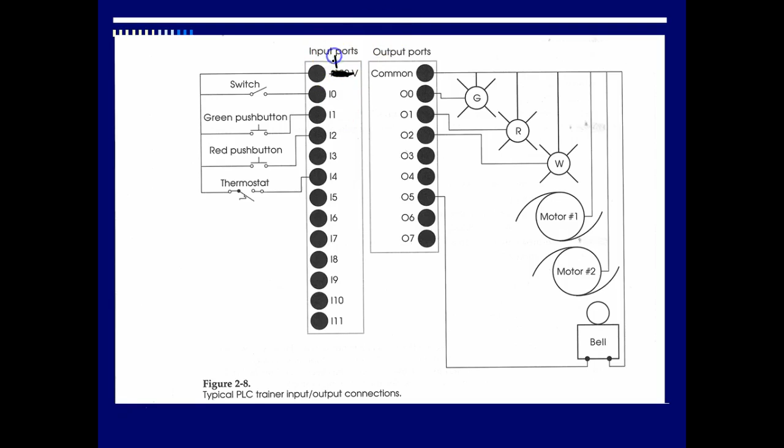So this is not sinking and sourcing, but if this was DC, they say AC on this one. I don't know if this figure is right or not, guys, but we'll just make it DC. So let's come over here and I'll say plus 24. And then this would go out, and this would be the common for all my inputs. So that means my inputs would be sourcing, so this module would have to be a what? Sinking module. You understand that?

That makes sense? So over here on our outputs, this is a sourcing output on the 504s. So that means their common inside the PLC is a positive. So what would I have to send out through here? I would have to send a negative, good. And so we would say these devices would be sinking.

And this only comes into play with DC. If you're dealing with DC. Okay? If you're dealing with AC, common is going to be whichever is going to be the neutral for the line.

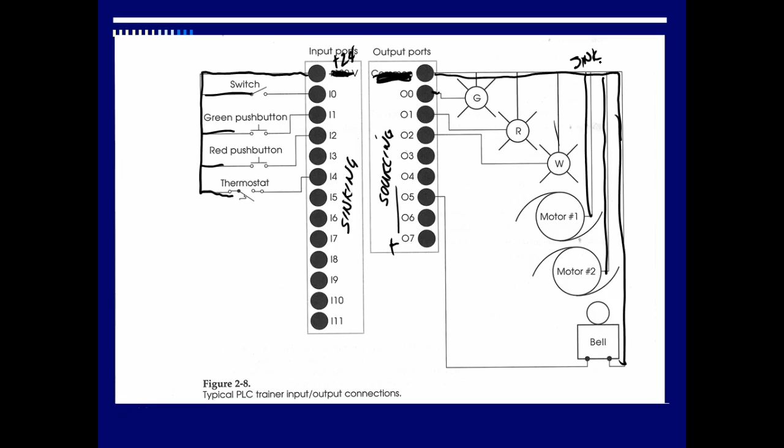Looked at that, talked about the scan. So the scan scans inputs, runs it through your program, updates outputs. We call this a scan cycle. And this is what the PLC is constantly doing. So your program is constantly looping whether you tell it to loop or not. In other programming languages, we have to do that.

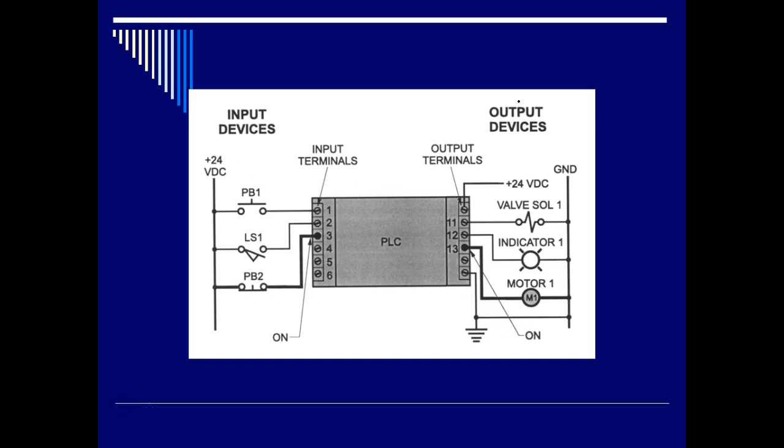So this PLC, these are what? Sourcing. So this input has to be what? This is sinking. So this guy would have to be... good. We looked at the basic ladder diagram, right? We did one.

So Allen Bradley, and a lot of y'all have played around with this. The way the addressing scheme is set up by Allen Bradley is that you start off, if it's an input module, you start and say what? I, then you put a colon. Now it knows it's going to use that as an input. Then the next thing you do is you specify a slot number. That makes sense? Then what you do is you specify words.

So this is 1, 2, 3, 4, 5, 6, 7, 8, 9, 10. One of these is going to be where you establish the common. Well, no. So on a slotted PLC, this is slot 0. I mean on the input. Wait a minute. You started at 1 for that first group. Well, I was just trying to figure out how many groups of 16. Oh, okay, sorry.

Allen Bradley runs word numbers in groups of 16. If you've got only one 16 module, then all you have to do is specify the slot number. But we can buy input modules for Allen Bradley that go up to 2 words, which is 32 bits. Okay, does that make sense? So if I've got a 32-bit input module, then I would have to say, okay, what slot is it in? So this would say slot 1.

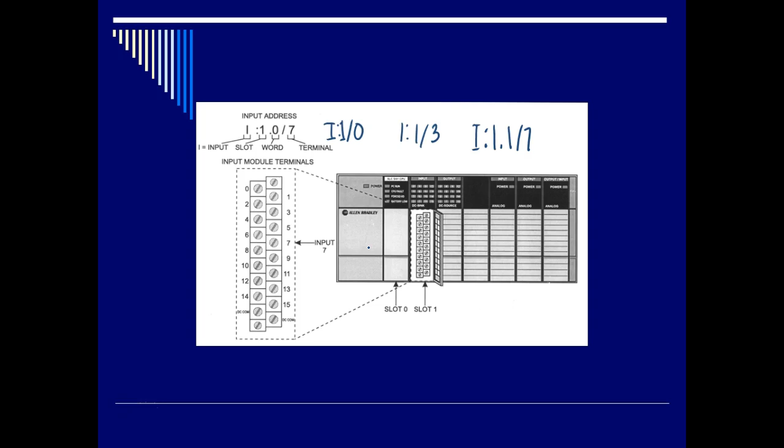So when it has 32, it just has 2 of those next to one another? No, it's all on 1. I'm talking about it's got a module like this, and it's got 16 down this side, and it's got 16 down that side on one module. So my question is then, you've got input colon 1 for the slot, then you put a dot, which lets you know that it's 32, right? Right. And then 0 for the first row, or 1 for the second row. Right. Okay, now I got it.

Yeah. If you don't have that, so ours are 16-bit modules, so we can address it I colon 1, and I need to make sure y'all understand this. So this is an uppercase I, this would be a 1, and then that would be bit 3. Which is this guy right here. I think this doesn't have a number. So this one, and this one. No.

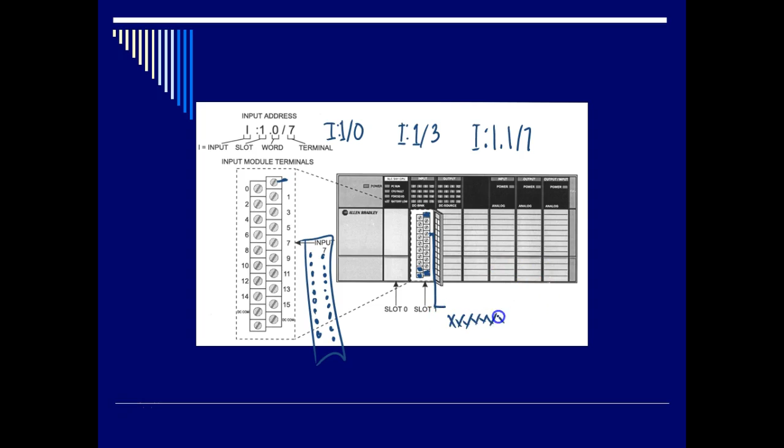What we do on binary, the bits have numbers and they go by the powers of 2. So if I've got a 16-bit number, this bit right here would be 2 to the 0. So we start with 0. So this is 0, 1, 2, 3. So on this situation right here, it just worked out to be the third one. Understand? So if I say I, then I say colon, and then I say 1/8, then this would be 8 right there, and that would be the one.

Yeah, but we start with 0. In addressing, we start with 0. It is bit 3, but the first bit we call what bit? We call it bit 0. So the first bit is bit 0. Now this kind of gets confusing, especially on this PLC, because if you look at the first input switch, they got it labeled 1. So it goes 1, 2, 3, 4, 5, 6, 7. I was looking at the input address up there.

Yeah, so this is slot, this is the word, and when it says the terminal number, that is not counting, that's the address that we assign to that number. Does that make sense? And we start counting from where? Start counting from 0. So this bit right here would be 0, this would be 1. So that's what they're calling terminal 0.

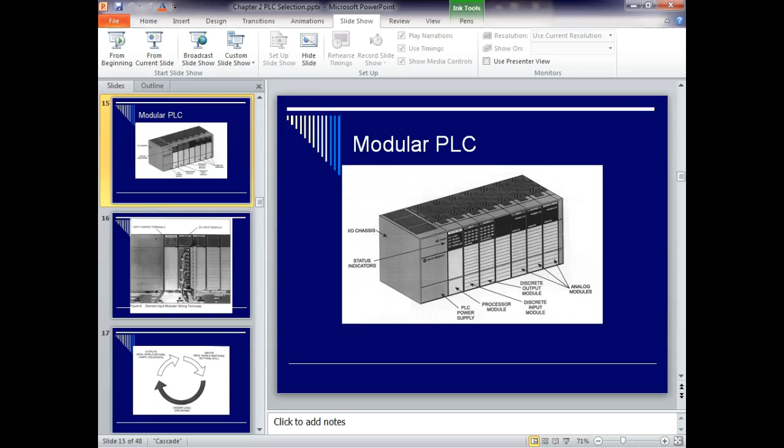Makes sense. So what happens is that when we come up here and this is a real neat application. But the problem is, if you've got that CD, you have to have that CD and a CD drive. So if you're doing this on a tablet or something that doesn't have a CD drive, it's not going to do you good. The license for it is like, I think, $15. It's in the lab book, I think. Isn't it? No. Oh, it's the hardback book.

So first thing we do if we're going to create a program on Allen Bradley, these are our instructions. Instructions are what we put in a program to tell what we want to do. And we have a list up here. What we're going to be dealing with this semester is these 4 guys right here. And then we're going to be dealing with timers and counters. But we're not there yet.

So the first thing that we would have to do, can't get it to go. By default on the Allen Bradley RSLogix software, it puts the end rung in there for you. You cannot put anything in the end rung. So the first thing we're going to do is insert a rung. Here's the rung instruction right here. I'll just highlight that, I hit this, and it puts a new rung in there for me. You notice the end rung gets another number. And then you grab what you want and drag it down in here.

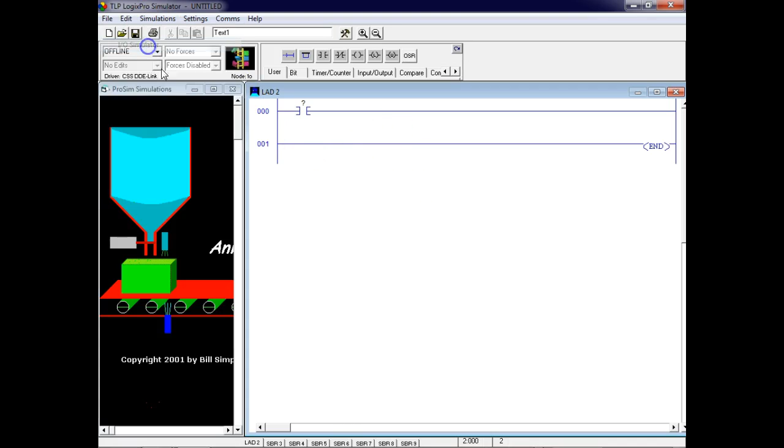So what I'm going to do is simulate the I/O. And this is what this PLC's got. Notice the first one is 0, 1, 2, 3. That was the slot it's hooked up to on the PLC. I've got inputs on slot 1, and I've got inputs on slot 3. So those are the two slots I've got available. You've got several symbols on this, which is really neat. Right now I've got a normally closed push button, but you can change it over to a limit switch, a switch or a push button.

So I've got to tell the PLC where this is at. I'm going to double click on that, and it's asking for a what? An address. So I'm going to say input, colon, and I'm going to choose that switch right there. So I'm going to say, what slot is it?

1/0. Okay? And I said enter. Now what's going to happen on the true Allen Bradley PLC is it's going to pop up and want you to give a symbol name. And what's so neat, if you give symbol names, if you're going to use that same thing from now on, you don't have to know the address. All you've got to know is the symbol.

And normally we give these symbol names according to what it does in here. If you don't do it, then you can come up here and actually add it. I'm going to put stop. So I'm going to make this stop, right? Does that make sense? Okay.

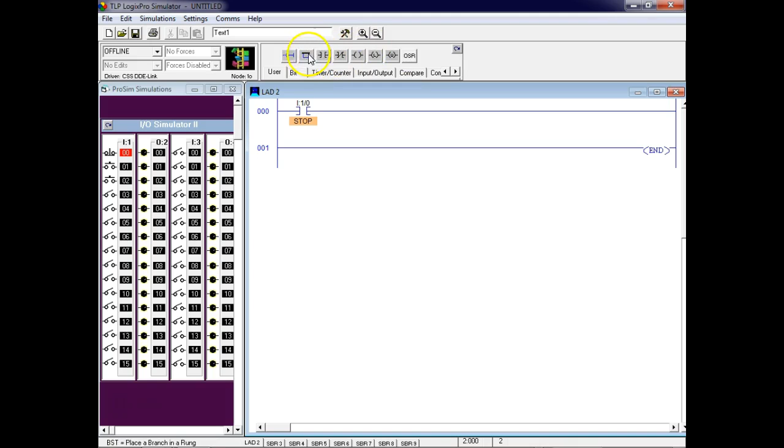This one's a little harder to configure because not only do you have to configure the CPU, you also have to configure the rack. Because when I select a fixed PLC, it knows how many inputs it's got, how many outputs, the addressing, all that kind of stuff. A modular PLC, that CPU has no idea what you've got out there because you can configure it any way you want, right? You understand that?

So I'm going to have to tell it it's a 7-slot rack, and then say in this slot I've got the what? An input port, and then I've got to tell it what type of input I've got. And this is usually documented on the doors. If you open any of these doors and look down at the bottom, it'll give you the actual part number for that module.

So I'm going to make this another switch. So I'm going to have to give it another address, right? I'm going to put I:1/1. And then when you hit it on the true RS Logix, it'll pop up asking you for a symbol name. If you bypass that, you can always come back, right click on the icon for it and then do what? Edit symbols. And then it'll let you give it a name. I know what it's going to be, but we'll see if it works on RS Logix.

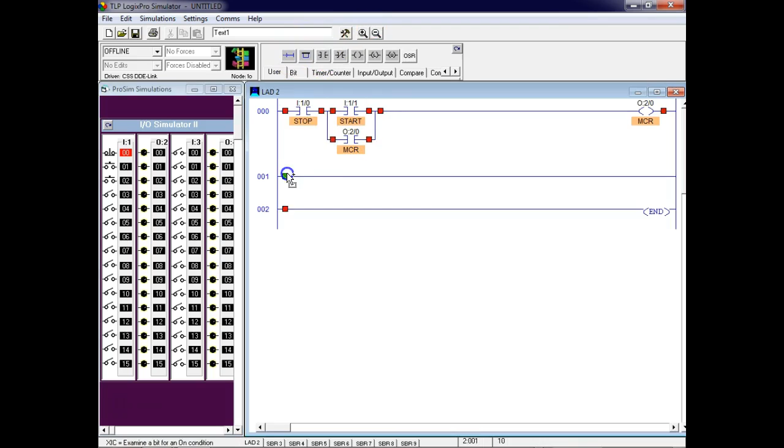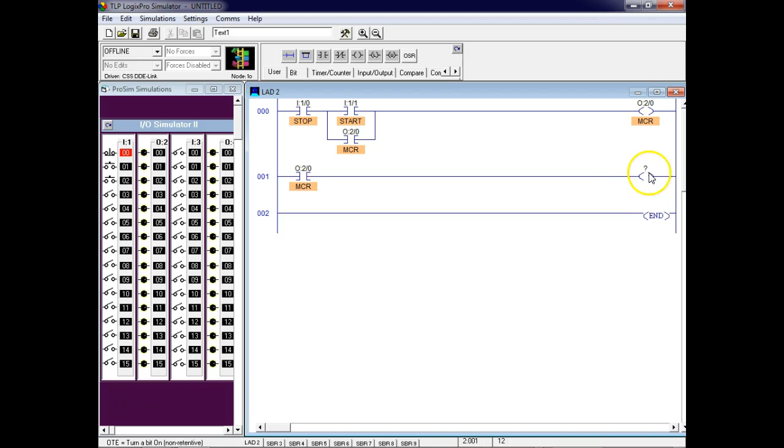Down here, I'm going to put a contact, but I'm going to give it the name of that relay over there. Output, colon, 2/0. And then I'm going to use another output. I'm going to specify one of our outputs. Okay, and we'll say this is output 4, output colon 4/0, which would be this guy right here. And then I can give it a name.

So here we'll just call it a light. The names are what you come up with. Now normally companies do this. They assign these things names. So instead of me saying output here, output there, they say, well, that's the start, that's the stop, that's your master control relay. And like I said, in RSLogix, once you assign a name, if you type that name up there in that bar instead of an address, it will automatically assign the address for you, which makes it real easy.

So now you're not worrying about outputs. You say, well, I want to use my start button. From now on, you don't have to know. Allen Bradley calls them symbols. Siemens call them tags. So what you do is you assign a tag to everything. And it's the same thing. It's just a little word that makes it so from now on you can deal with that name instead of trying to remember all these addresses.

I was just wondering why you labeled that one an output. Could be because it's connected to the O:2 where that normally open is. Yeah, well, this is module 4 right here. It's another output port. What I would think was a normally open input on your rung 1, not rung 0, that first one, the master control relay. I guess it's connected to your output up here, but you labeled it O:2. Is there another on your next rung, that first input?

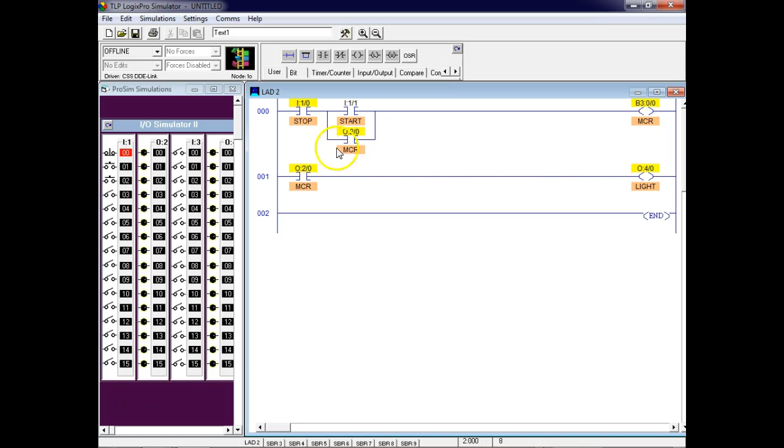B3 started. So this is my only true output right here. It doesn't change the symbol. So LogixPro is not exactly up to par. So, okay.

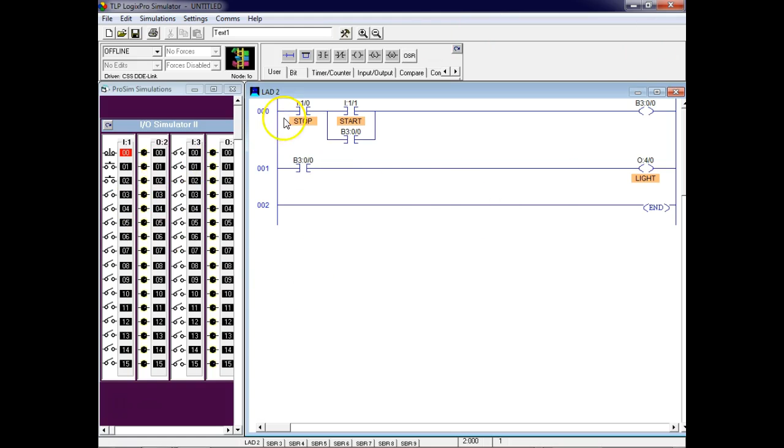By the way, anytime you create a rung, and I'm going to show you the actual thing, you get an arrow here until you get everything straight on the rung. LogixPro doesn't do that. Okay. So I'm going to come up here, and of course I lost my symbol. So let's go online.

So what we've done here is this guy right here doesn't exist physically. It's totally software. It's inside the PLC. Because you're thinking, okay, for all my relays I've got to assign it to an output. You only need to assign it to an output if you need to drive something outside, right? Does that make sense? We call this a soft contact or relay. Watch, it works exactly the same way.

So now here, the only output that's working is the one that I want to physically do something. This right here is inside the PLC. How did you know that? Because I knew it. We have two what they call bit registers inside the Allen Bradley. We have the B3 register. You can use it for all kinds of things.

And some of them have what they call a B10 register. I don't remember if the 1000s have got the B10 in it or not. I know the 504 does. So that's 512 things that you can use without generating physical output. And so this is the way I would do this circuit right here. This couldn't be an E-stop circuit because E-stop's got to be hardware, right? But I could definitely simulate that contact with software.

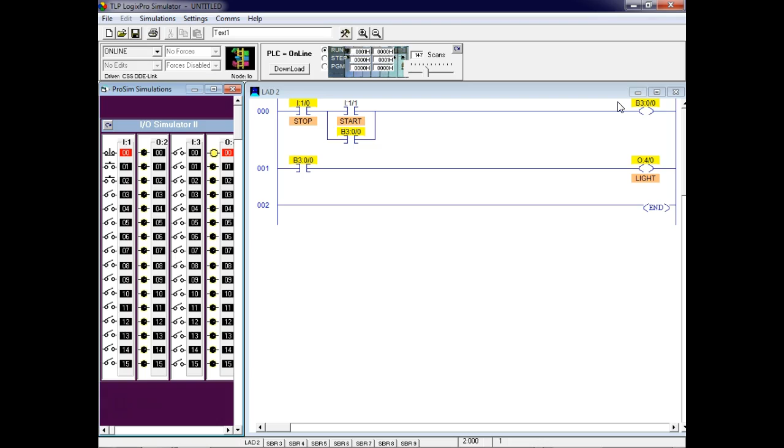Now the only problem is when you download them into the PLC, the symbols are not downloaded. The addresses will be the same, but there won't be any symbols. So if you upload one into your computer, you're not going to get any symbols. I think Siemens actually puts the tags in there as part of the program. So this is RSLogix, the actual software.

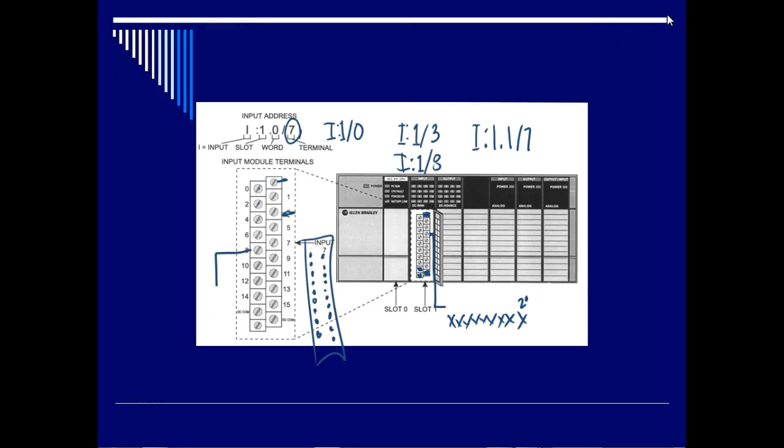Let's see what else we've got in here. So this would be a 32-bit input module. This is a really good picture. So if I've got a 32-bit input module, since Allen Bradley goes in 16, this would be word 0 and this would be word 1. But if all you've got is a 16-bit input module or less, then you don't have to specify the word number. You just specify the slot number. That makes sense?

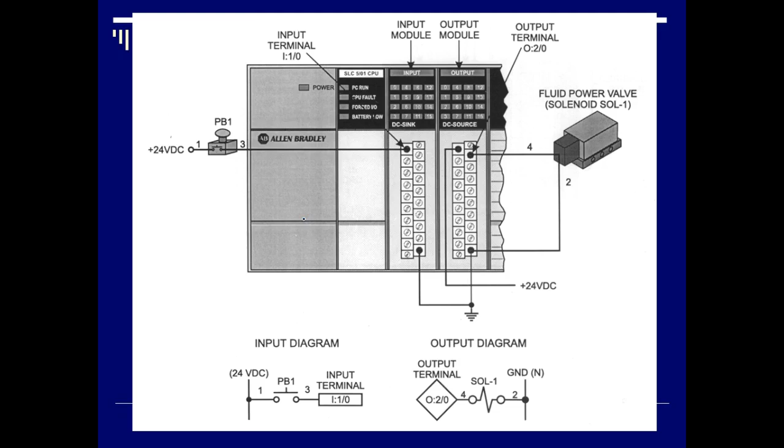So we don't have to specify it here. Input, output, sinking, sourcing, we already looked at that, right? This shows you how we would hook that up. So we actually have two circuits. This would be the input module, and this would be the actual input. But the circuitry inside, which they don't show, is actually hooked up to the other line right here. So all your outputs are hooked up to a common over here too.

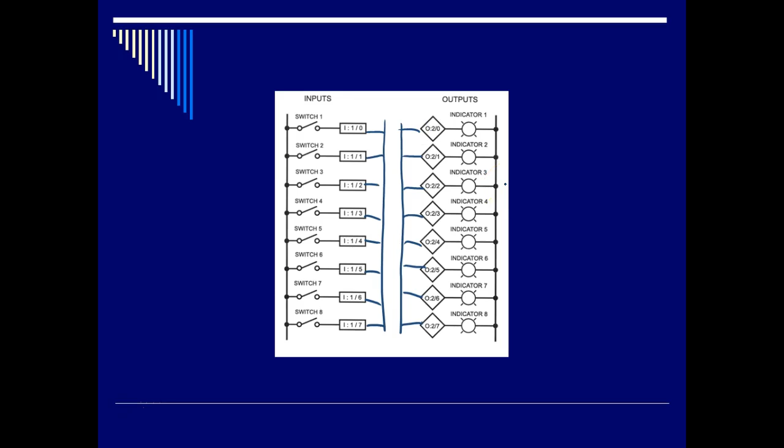That makes sense? Because it's all common, this is the big difference. So that means if I come over here and this right here is a minus, then these over here have to be a what? Plus. Right? You understand that? So we would say the PLC inputs would be sinking and the input devices would be what? Sourcing. Now, if this is AC, you'll establish a common on AC, and there's no such thing as sinking and sourcing.

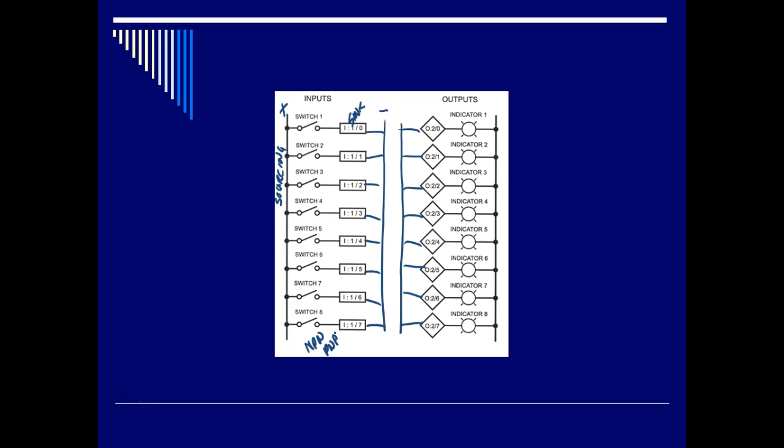Now, sensors, what did I tell you about the sensors? They're going to be called what? NPN or what? PNP. NPNs are sinking sensors, PNPs are sourcing. Sourcing, sinking. So I think we've explained that pretty well, right? Sourcing, sinking, and then this is where we're at now. Okay.

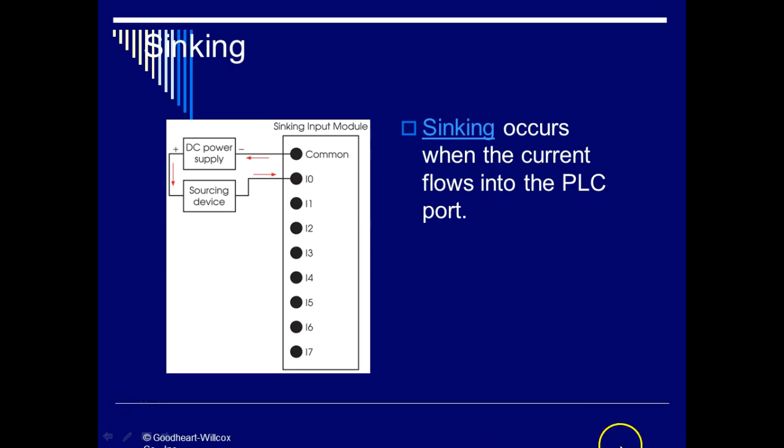When we open up a program, I'm going to escape from this, and then I'm going to have to actually open up the RSLogix software. First of all, we have different methods that we communicate with the PLC, what we call interfaces. Allen Bradley uses what they call DF1. It has really no acronym.

They have what they call the Data Highway, which is a DH method. They have EtherNet/IP, which is basically Ethernet, and they have DeviceNet. Siemens uses Profibus, and they use Ethernet, what they call Profinet. So all our PLCs should be set up already. But if you're hooking up a new PLC, the first thing you're going to have to do is tell this thing how it needs to communicate with the PLC.

So Allen Bradley has an application called RSLinx. I don't see it, so I'm going to bring it up. I've got this PLC right here, and I've got mine set up right now for Ethernet. So I'm going to have to reset up the way it communicates with this PLC. So Rockwell Software, and we're going to use RSLinx. And then we'll come up here and just say communication.

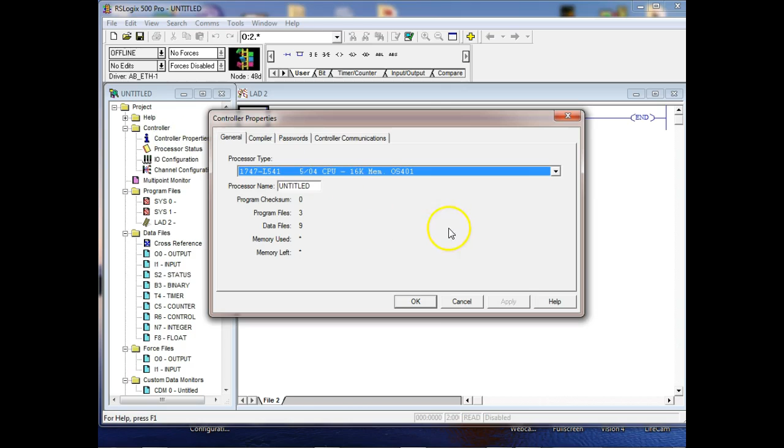So I'm gonna go down here and select 1747-L541. And there it is right there. Okay. And then it brings this up. But the problem is it's a modular PLC. And that's where all this information is over here. So if I go over there, this tells me the processor I have selected. You can give the processor a name, by the way. So I said I could call this processor Ridge.

But I'm gonna configure the I/O. And what's the first thing we need to do? Well, this is a rack PLC. By default it comes up and says I have a 4-slot rack, and I have a 7-slot rack. So what's the first thing I need to do? I'm gonna come up here and choose a 7-slot rack, not this one. This is multiple racks, so this guy would support up to 3 different racks. And you got a cable on the side that you could just jump down,

and this would give you the ability to expand it. So it shows me that slot 0 is occupied by the CPU itself. So now I'm going to say what's in slot 1. The input. Now this is going to show everything. So I'm just going to go to inputs, and then on your input module you'll see the same thing. This is a B16, this guy right here. So it's a sinking module, right? 16 inputs. Where would that information be at? It's going to be on the little flap of the door. Look down at the bottom of the door.

I know it's time for a break, guys.

Then I would come down and I'm going to select nothing but outputs. Now, on the 1100s and the 1000s, you don't have to do this because it's a fixed PLC. If you get one of the 504s, you're going to have to do this every time you make a new program. But it don't take long after a while. This is a B16, and then I'm through. Now I'm ready to start programming this. So my PLC knows all the instructions I want. It's all up here.

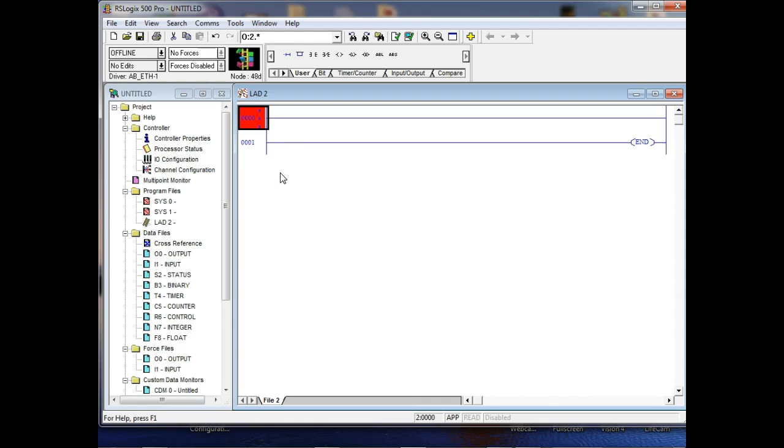Oh no, this is supposed to be activated. I'm gonna have to see what's going on. I'm gonna put this in here. I'm gonna pop that in. Notice on this one right off the bat, it put all these E's over on the left-hand side. That means I got an error on that rung. Why? Because I don't have anything in it, right? So right now I got a short circuit, which is definitely an error. Then I'll come up here and I'll do the same thing. I'm gonna assign an input.

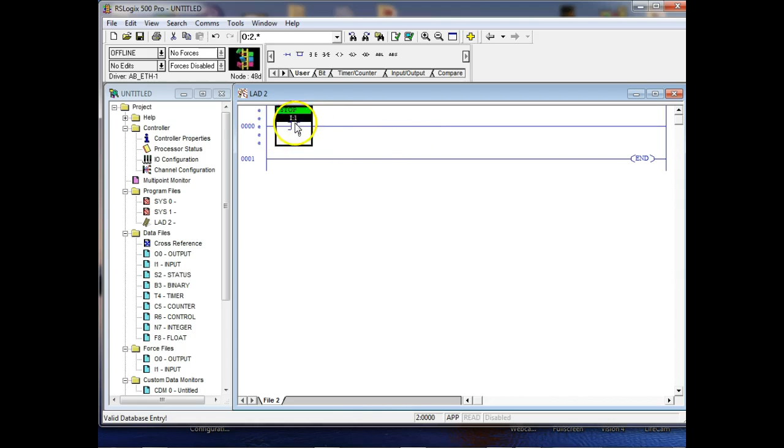But now what's the slot number for that? I:1/0. Okay. And notice on here it comes up asking me for a symbol. But you can put a comment up there. Oh, it's not stop. I was just wondering if you didn't put the address in that blank spot. No, you've already got the address. Still got an error because I don't have an output. I'm gonna come up here and assign an output, and my output is what? Module 2.

Huh? No, that's a simulation. This is the real guy. So that's the button right there. That's the guy right there. Okay, understand that. And then when I enter this, it's going to ask me for a symbol. You can say okay. If you do that, you can come back later on by right-clicking it and giving it a symbol.

Yeah, Siemens call theirs tags. I hit the caps lock key. Mute.

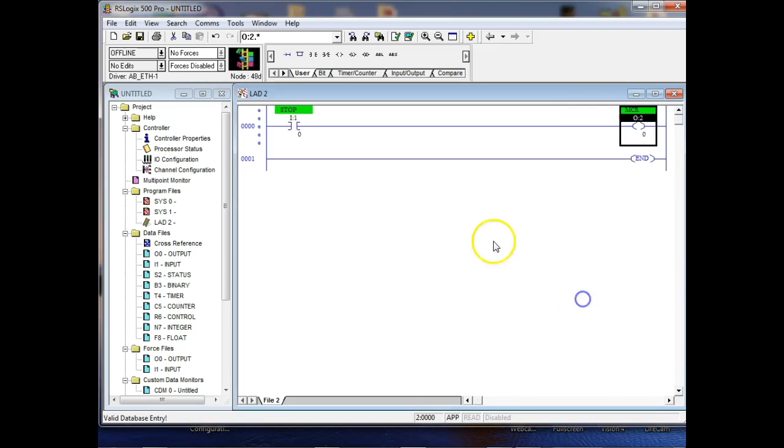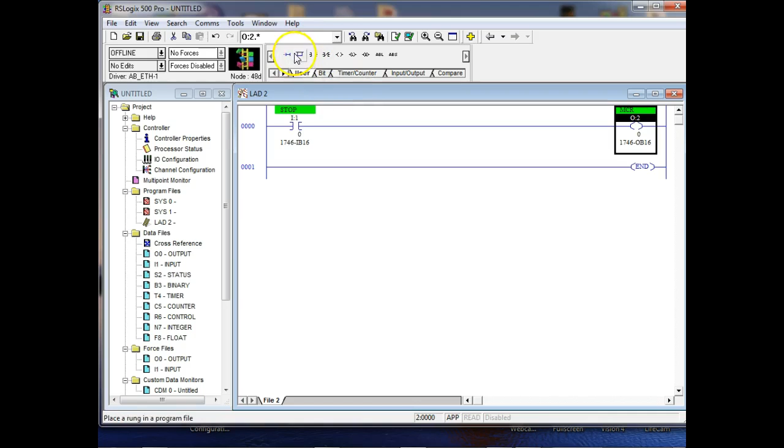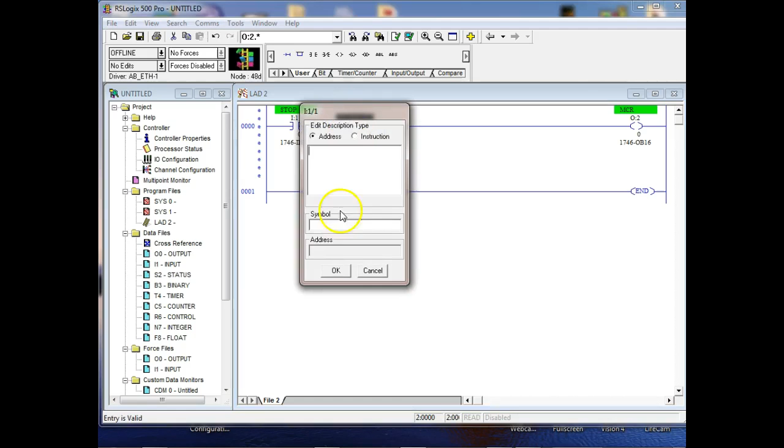So let's go ahead and do the other one. Y'all go ahead and take a break. I'm going to do the same thing. Oh, well. That was good. So I should have let that fall. I'm gonna delete that and show you what you can actually do with the regular.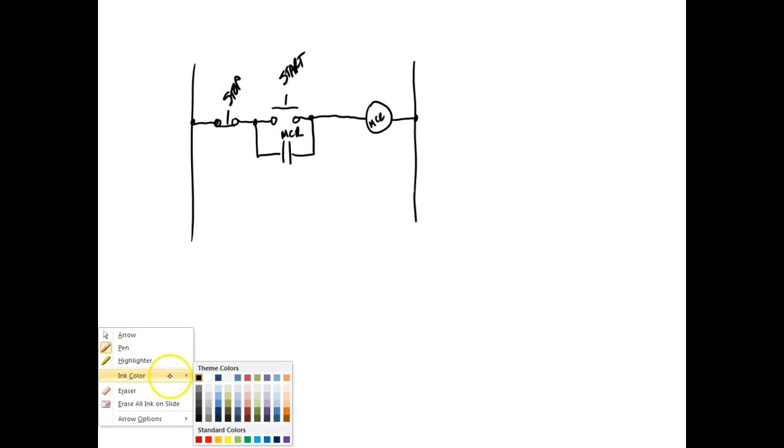Now the problem with PLCs is that we have a switch that we hook up to a port. And as soon as I go into digital, I'm not talking about closed and open. I'm talking about true and false. What is true and what is false? Okay, y'all understand that? So when I come here and I actually look at these I/O tables right here, you can look and see what's going on digitally on your I/O.

When I close that switch right there, what does that bit in memory do? So this is a bit in memory. So that's a byte, that's a word in memory. There's the bit. I'm going to come up here and I'm going to close that switch. And what does it go to? It goes to 1. Is that true or false? You got a definition for those? It could be either a true or it could be a false.

It's just like I could put a glass up here and I could say if the glass is empty, it's true. If it's full, it's false. Or I could just as well say if the glass is full, it's true. So what we do is we say, okay, what does this mean? It means that switch is closed. Well, if I use an examine if closed, then a 1 in this table is true. If I put examine if open, then a 1 in this table is false.

So you understand? So right now I'm using examine if open. So this is a 1, but I'm using an examine if open. So that sucker says, okay, that's false, and nothing works because I'm using an examine if open contact. What is true is what it interprets this right here as. So if I'm using an examine if open, then it's going to look for this to be a 0. So watch what happens when this goes to a 0. And that sucker up there becomes true.

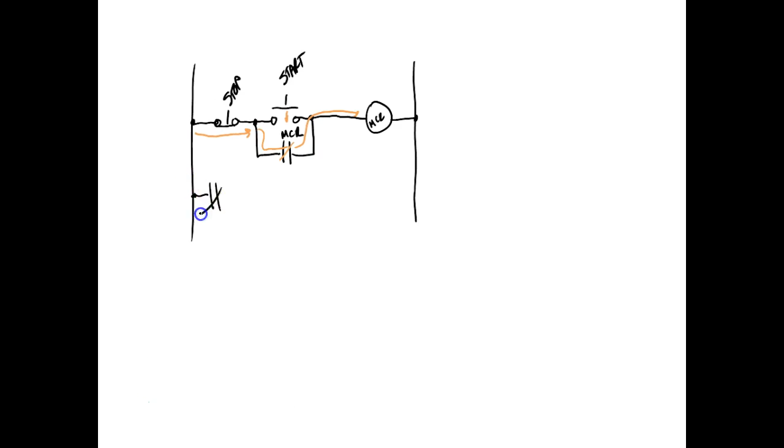Well, the problem is that if I was going to come down here and use a contact, and this is what gets people confused, if I came over here and did this, and came over here and did this, then that light would be on if MCR. And that's a normally closed contact. Well, in PLCs, we don't say normally closed contacts and normally open contacts. We say examine if open, examine if closed. And if I was going to program that into a PLC, I would use this, and this. I'm not going to assign addresses. I would come up here and use this, and down here do that.

And that's what gets people confused. Because down here, that is a simulated contact, and it's going to be true when that thing says turn that thing off, right? So if you're doing it by a relay and you want to do an examine if open, it's going to open that bit. So this is a simulated contact that I would assign to that guy right there. Does that make sense? But the problem is, if I use the stop button, I got to use the what? Examine if closed.

And this is one of the hardest concepts for people to understand. They come out of motor controls and they'll say, well, that's the problem, you're using a normally open contact for that right there. It's supposed to be normally closed.

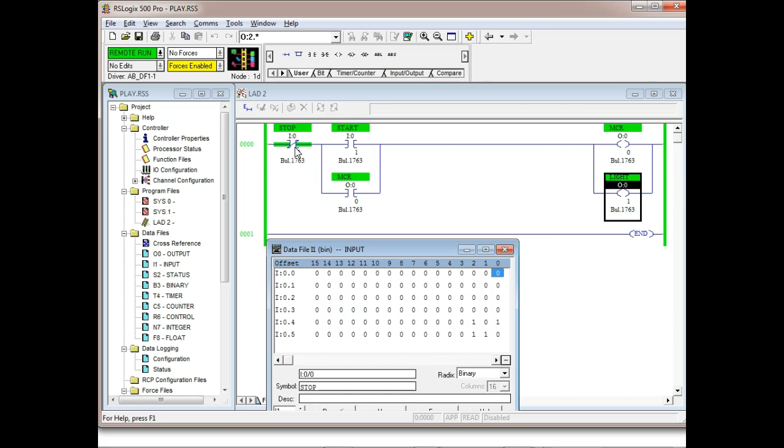This is what my computer's reading back from an input. It's reading what? A 0, which means the switch is open. But it's true, because this is an examine if what? No, this is an examine if open. So you can do that. I think you can do that. If we take it back to, instead of dragging it down, let me look here. Let's go offline. And then I think we can change, yeah, so.

Yeah, but that's what you're defining. You're defining they put a 0 and a 1. That's what those marks mean. The little circle with the dash in it, that's a 0 and a 1. I never knew that. Well, you do now.

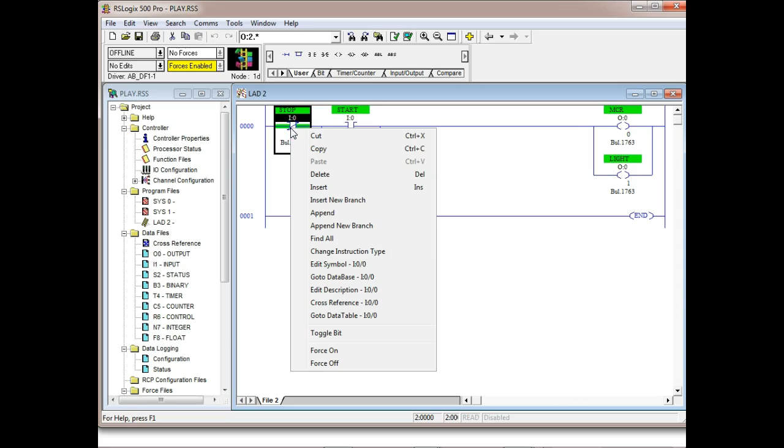So, by the way, we can change this around, I think. So let's see, what do we got? Edit symbol. No, we don't want to edit the symbol. I thought we could change it right here.

So what you're going to have to do on this guy, and this is what I want you to do once we get into these master control relays, is your stop button would just be up all the time, right? And that simulates a normally closed contact. You can't do this on the 1100s. The only thing you got on the 1100, the only thing you got.

The only push buttons you got are these guys right here, and guess what? They're all normally open. So what you'll have to do is assign your stop button to one of these selectors. You'll close it, and then you'll simulate a normally closed push button. Right? But you won't have to do that until we get later on in the program.

When you take advanced PLCs, every program you write is going to have a master control relay. Every one of them. Because that's usually what you see out in the industry, right? It's always nice to have one button. You can do what? You can hit it and it shuts everything down. Not an e-stop. An e-stop is special.

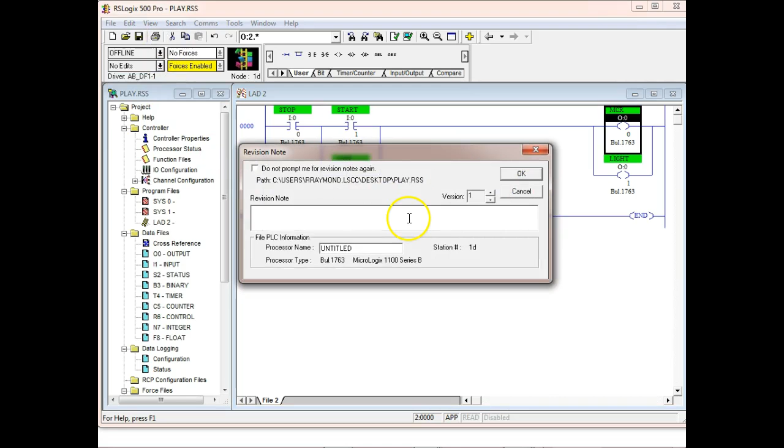Now it should run. So this is the actual physical PLC, and this is basically it. Now, all we're going to do is just do more complex programs. But the process of uploading, every time you create a program, what's the first thing you're gonna have to do? You're gonna have to set up the CPU, right? If you're doing this guy, what are you gonna have to do? Yeah, you're gonna have to assign the rack, right? And how do you do that?

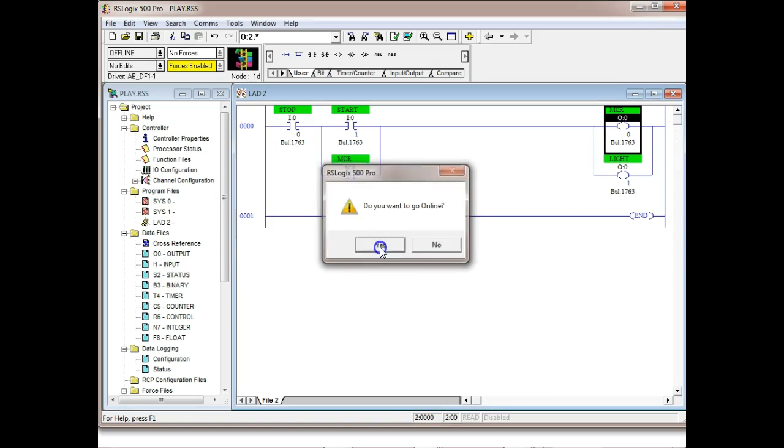So once you assign a processor, then you go to IO configuration, and then you assign the rack. And we're using a 7-module rack, right? And then you assign the input. Well, it doesn't make any difference, the inputs or the outputs. But it'll have a slot number over here where you come up and you select what slot it's in. Of course, the CPU is slot 0, right? So this would be slot 1. This would be slot 2.

On these hybrid PLCs, if you don't put a module on the side, your inputs are going to be module 0 and your outputs are going to be module 0, because they're all fixed. They're not addressed by a slot, right? Are you okay? That makes sense? More or less.

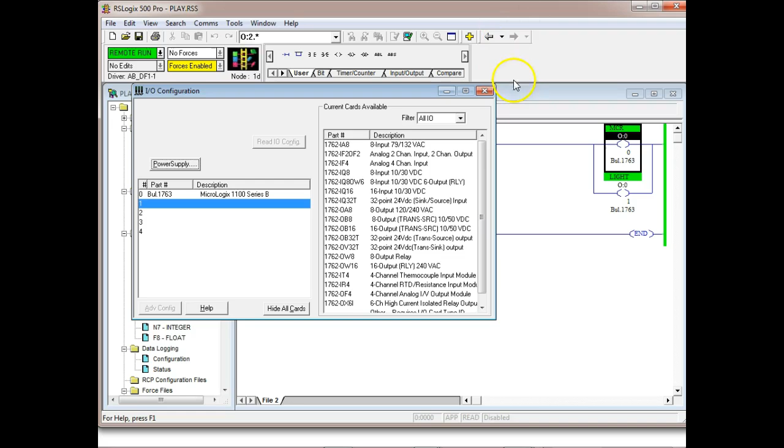So I'm going to insert another rung, and then I'm going to put another contact right here. And what I'm going to do with this guy is I'm going to assign it a contact off of this relay right here. Which one you want to do? Let's do output 0/0. And notice it automatically gave me that. Of course, I could have typed that in, by the way.

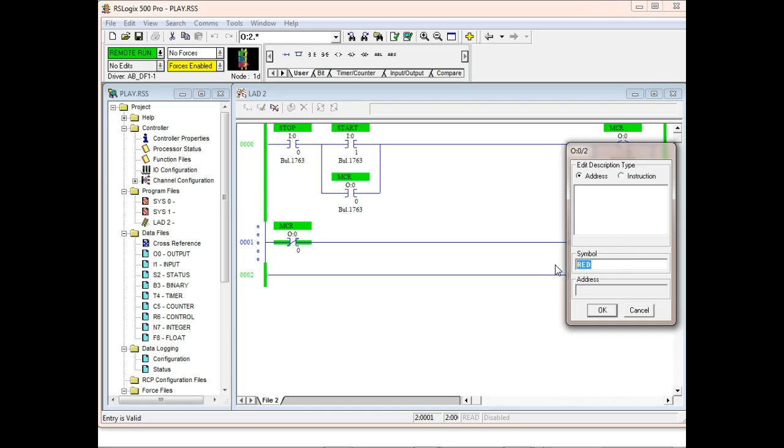And we'll assign this another output. So output 0/2. And it could be motor. I could assign it to motor. Okay. I'm going to check it for errors. Oops, got an error somewhere. What's the matter?

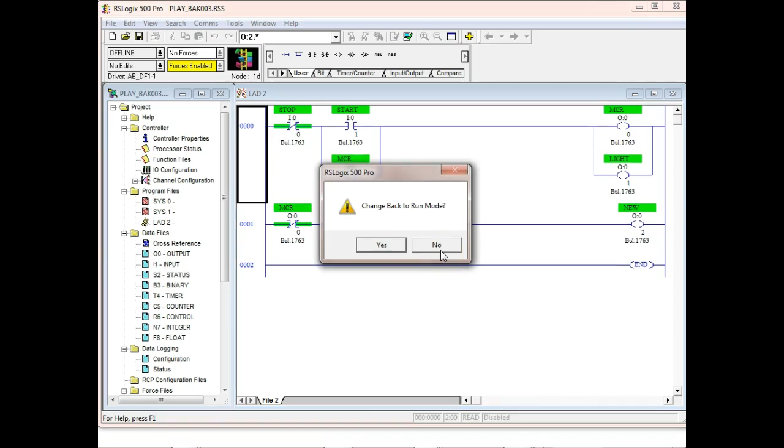The MCR, does that matter when you label your last output? You put MCR, so it doesn't match maybe? No, it does match because I'm assigning to this relay right here. Okay, let's go ahead and create one. It's going to pop an E up there because you got short circuits. And then you hit that little check button right up there. Of course, I can't do it now because we're online. No, it didn't change.

Okay, so let me go offline, because I changed it when I was online. And I'm going to come back here and change this. So I change instruction type, to examine if closed. And it gave me an error, right? And I'm going to come up here and check it. And now the change should be made. So that's an examine if closed. Okay, so I'm going to download it.

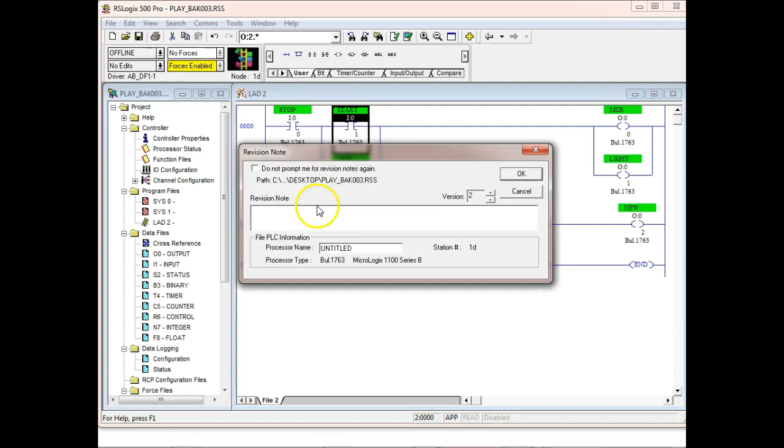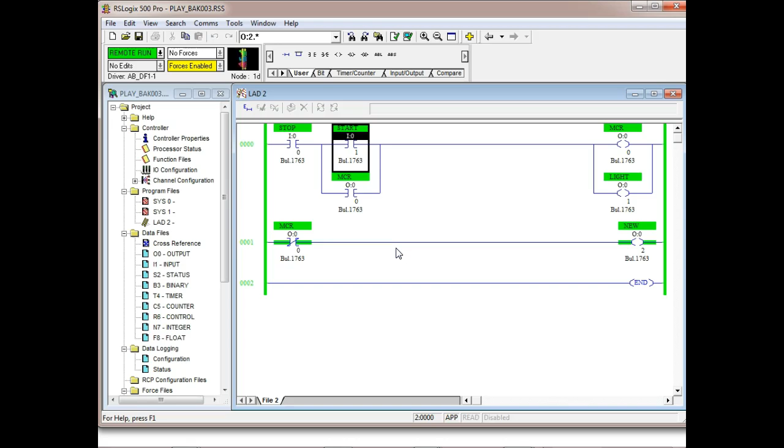And it asks me, do I want to switch to the run mode? Switch back to run. Now I'm going to change my contact over to a normally closed system, which is what I want. And I'm using the examine if closed. It should have went true. So it went true.

So now if I run it, I'm still using this switch right here to run it. I can still stop it. I didn't wire it up. I can wire it up. And so now if something happens out there and we got a broke wire, it stops. And then I can wire the circuit back up.

So I've already got a common over here, so I'm just going to jump my common over to the next switch. And then I'm going to put this in here. Make sure this switch is in the neutral position. And we're using input number 1, which is right there. This is a normally closed contact. I'm using the examine if closed. So it's closed if it's true. So now, this is what it would be.

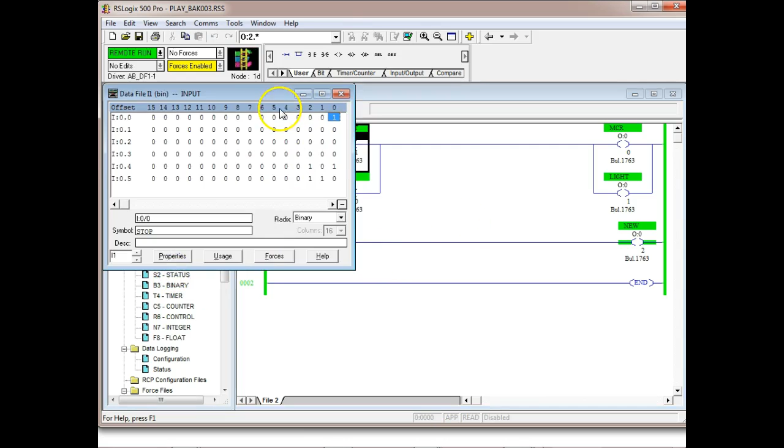So normally closed. But if I look at the actual input, here's my input. Okay. So what we're saying right there is this is examine if closed. So now it's interpreting that 1 as being true, right? Understand? If I come over here and push this down, then it goes to 0. So that's what you're doing. You're saying, okay, what is that 1? Does it mean that thing is closed, or does it mean it's open?

That's one of the two hardest concepts to understand: examine if open and examine if closed, and sinking and sourcing. Those are two of the hardest concepts to understand.

In one class, I'll show you how we would do this with the Siemens PLCs. Siemens don't call theirs rungs. Allen Bradley calls theirs rungs because this is what we call them in electrical control. Siemens calls them networks. So what you do is for every rung, you establish what they call a new network. And then you would do the same thing.

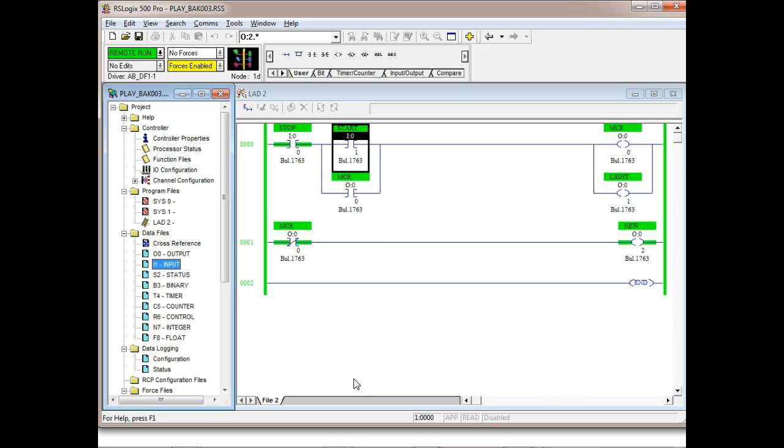On the Siemens, you don't have to go through that whole thing up there finding your instruction. All your instructions are over here on the right hand side of the menu. We do have all the instructions up here, if I can remember how to get to it. Yeah, this is the instruction palette right here. So instead of going through all these menus, let's go offline. If you bring up your instruction palette, then you can grab anything you want to over here and slide it in, I think. Oh, let's see.

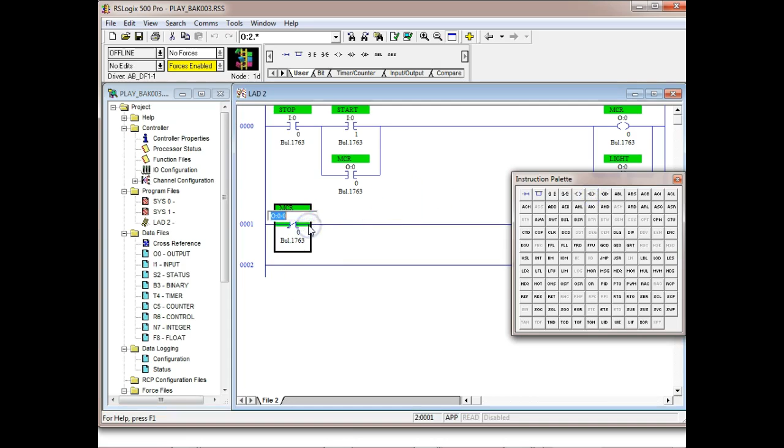To introduce Siemens stuff in PLC2, we'll go over to the lab and we'll put a basic program in. It's basically this program here, just to let you see the differences. We don't have enough time to teach you. It does everything that you do. It's got counters, it's got timers, it's got compare instructions, it's got all these high-level instructions. But all we have time for is just to let you put a simple program in.

I think what I'm going to do is, we got a bunch of these. I think in PLC2, we're going to let you wire up one of these panels. Actually wire the PLC up. So this is actually wiring for the PLC, and these run through slots to this front panel. And then once you get the front panel lined up, then you can insert anything you want to in there to make it work.

So here if I wanted to use an add instruction, I could just come in. So instead of me trying to go through here and find the different instructions through all these different palettes, if you bring that up, you can just leave that up. You can drag anything you want to. And how do you get to that? It's this little guy right here. That'll bring up what they call your instruction palette. But you got to know mnemonics, what all these mean.

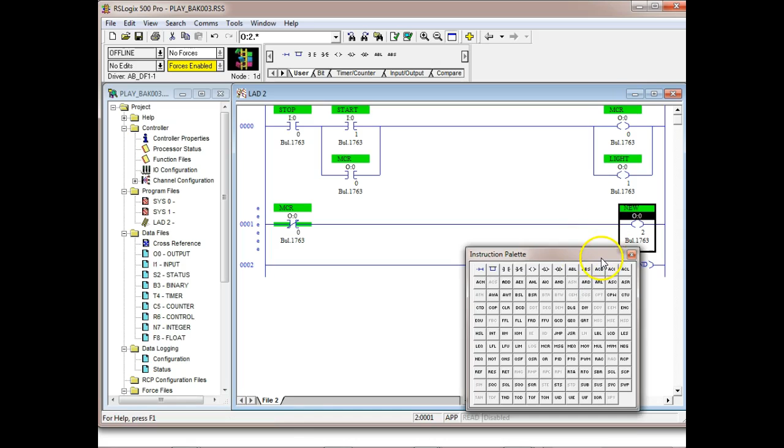The only thing I remember using it on at US Steel was on the magnet control circuit. What's that? We put two different coils. I don't remember if we have a lab on that or not. I know we do latching and unlatching relays, but I can't remember if it's in advanced PLCs or this class right here. So let's see if we've done everything in this chapter right here, guys. Thinking, sorting.

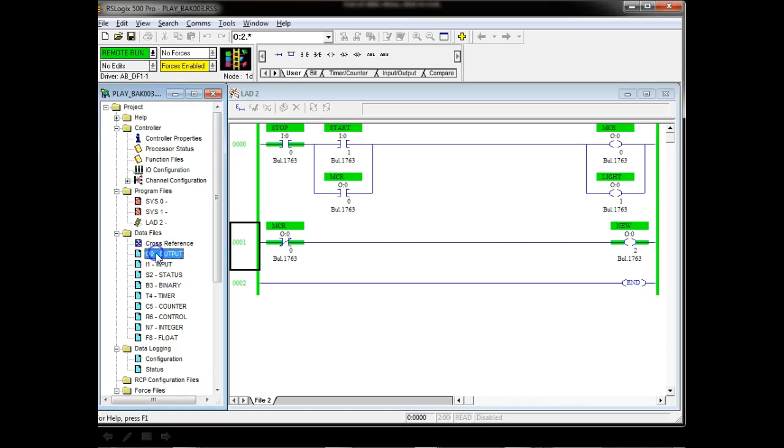So this is some of the memory that you can actually look at right here. So over here it's called data files. So if you want to monitor your outputs, you just come up here and do what? Gotta go online. So this would be your actual outputs, right? That makes sense? This is where you'd monitor your inputs.

So right now, if I look at my outputs, it says that this one right here is true, right? And there it is right there, it's true, right? See that? Makes sense? Here's our inputs. And it's telling us that this guy right here is true. So these are actually data files. This is our status register.

The S2 register is a really neat register. It's actually constantly running. Can you see it's just counting? So what we do, if we know the speed of it, we can use the different bits; time delays and stuff like that is built into the PLC. But it shows us our errors. So if we got any errors, luckily it says no errors. It shows us our processor, what's going on there.

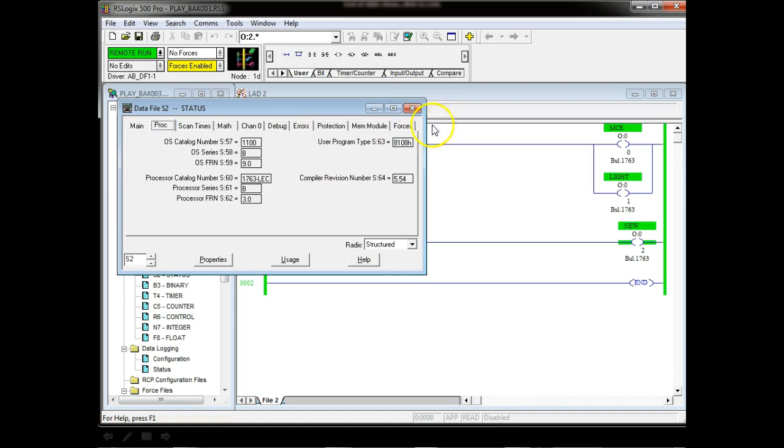This is your B3 register. We're not using that in this lab. These are where your timers will be at. This is where you can monitor your counter memory, your control register, which we don't get to in this class. This is where you can deal with your integers. You know what an integer is?

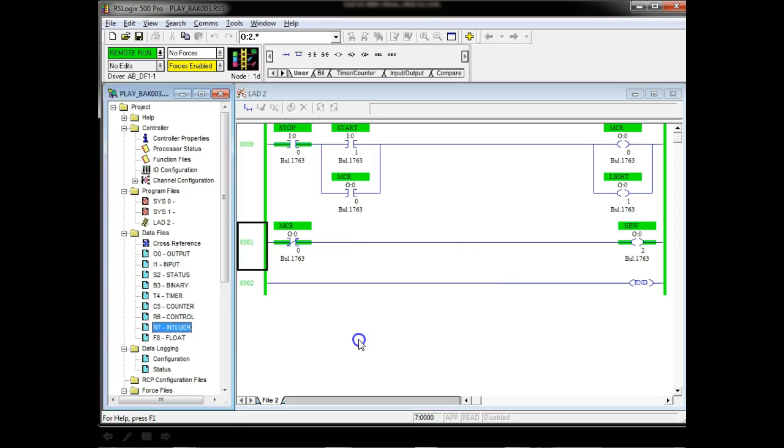Now, what's an integer? It has a whole number. So an integer is a whole number. It doesn't have a fraction. If we're going to deal with fractions, we'll have to switch over to floating point numbers. But here's all your memory files right here.

Here's ladder 2. So the name of this file is called ladder 2. So if I get off somewhere and can't get it, I can double click on that. And so this is file number 2. Later on in advanced PLCs, we'll show you how to add different ladders to this application called subroutines. So if you add another one, you'll have a file 3, and then over here you get a ladder 3.

And how to do that on the Siemens PLC, I haven't got the slides. Like I said, I'm learning that. So I put that IO module on there. I have no idea how to address it. I'll find out.

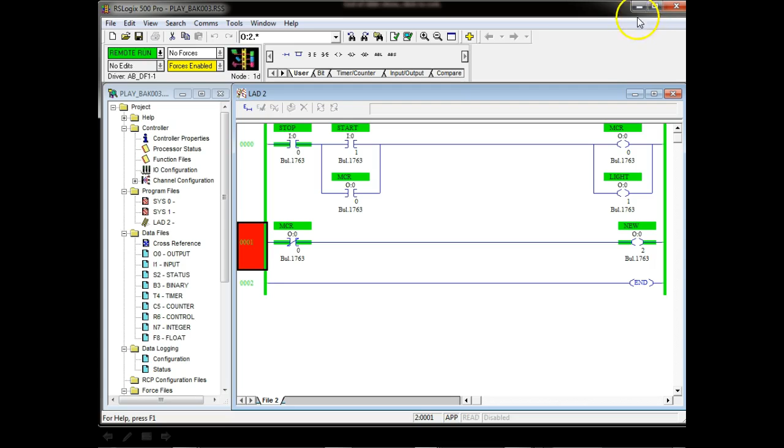Ladder logic program, 7% system memory, executed information, 20% of the memory. These are the different files. So we just saw those, right? So we got the ladder logic. That's all in what they call ladder 2. Now why they don't use ladder 0 and ladder 1 in Allen Bradley, I don't know. So your base program is going to be in ladder 2.

Then we have the input status. We looked at that in the PLC, the output status, timers, counters, and then we got all this other stuff, all your math and logic, which would deal with your integers and that kind of stuff. So all your memory is divided up inside the PLC. Of course, what they're doing is they're actually giving you addresses.

Network communication. We talked about this a little bit. These are the 3 methods we can go with an Allen Bradley PLC. They call it the Data Highway 485, which is, for years we had the Electronic Industry Association, EIA. They established a lot of the hardware that deals with computers. About in 2011, they disbanded because there was other people out there that could do that.

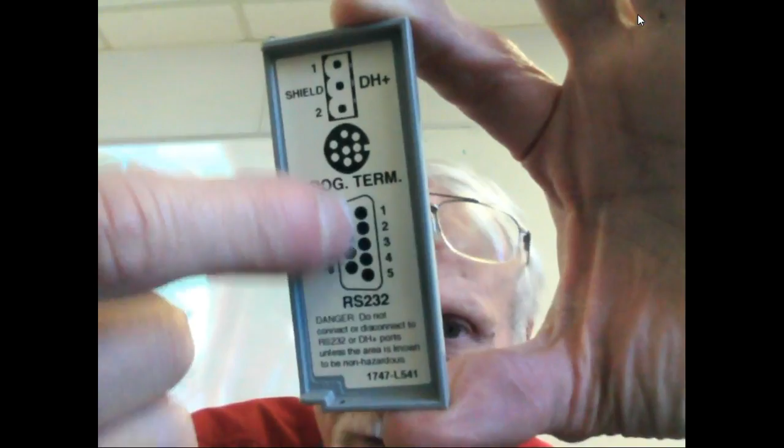So this one right here is the way we would use coax. So it's a 2-wire coax with a shield. This is the RS-232 connector right here. So this is the other way we would hook up the data highway. And this is if you hook up a dedicated terminal. So we won't be using this.

By the way, here's the number for the CPU. It's right down at the very bottom. We're using this method right here. We're using the RS-232. Okay, and that's what y'all will be using down there. Except on the 1000s, instead of having a DB9 to a DB9, you'll have a DB9 to that round connector. Have I lost anybody?

DF1 is not used anymore. Then we have the next one. Did they talk about that? 2 types, full duplex and half duplex. Full duplex, this is what your cell phone is. So we have simplex. Simplex is communication in one direction. So TV stations use simplex. So they send you that thing and you can't communicate back to them, right? That's simplex. So simplex is communication in one direction.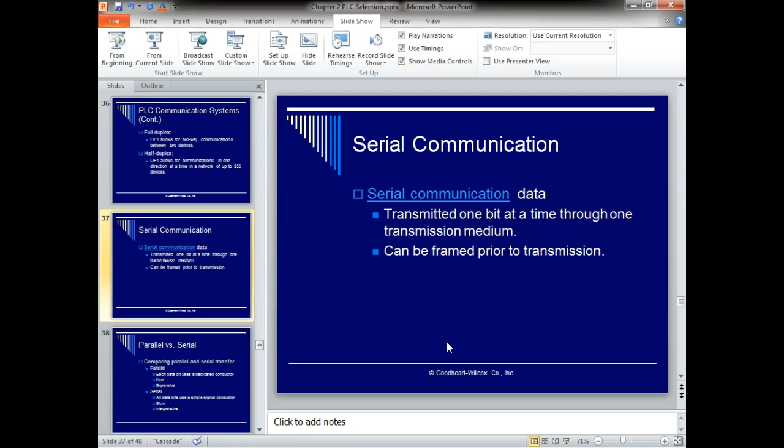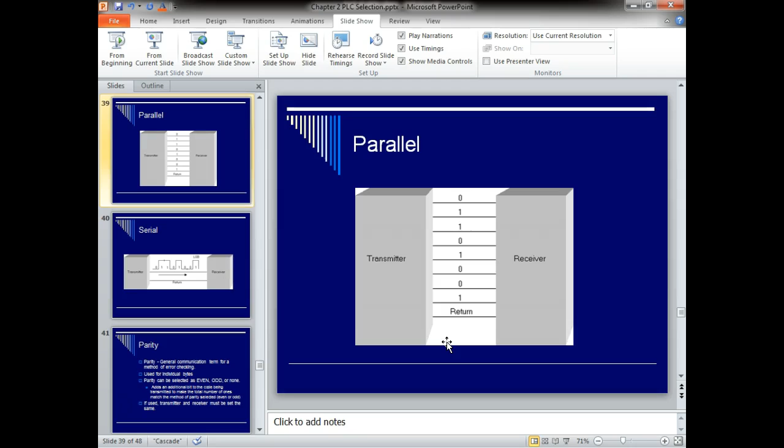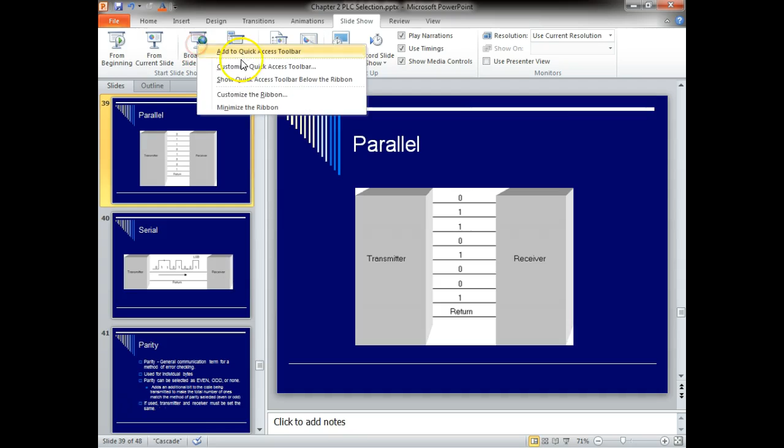And it's real neat. USB is really neat. How these packets are put together, what they contain, how they go out, how does the receiver synchronize with this, how does it know what the ones and zeros are, there's a lot more to it. Luckily we don't have to know that. And we're not going to spend much time on parity. We don't use that much anymore.

And DTE, good gracious, all this is in there. DTE, data terminal equipment, what are these? These are guys that initiate and terminate communication. So what would a printer be? It'd be a DTE. What would a computer be? DTE. Anything that controls it or it passes through, these are what we call DCE, data communication. So in Ethernet, your routers, your switches, your gateways, all these would be considered to be DCEs.

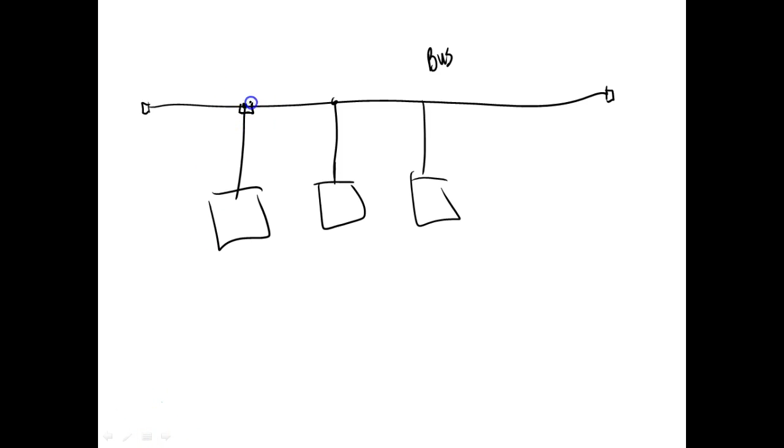Then we have what they call a bus. So here you literally have a cable and you come in, and what we used to do is put these T's, and this is what DeviceNet is. So DeviceNet is a bus. So anytime I want to tap off to my trunk, I would have to insert this thing called a T, and then it would tap off like that. And it's all screwed in. If I can remember, I'll bring some DeviceNet stuff over here for you.

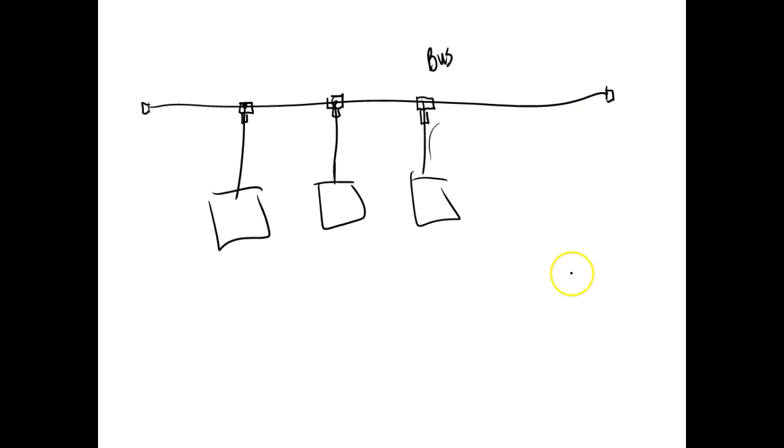But what was happening was that if we didn't terminate it, then this communication would come back down here, and it would be very, very noisy. So we had to put these terminators out there.

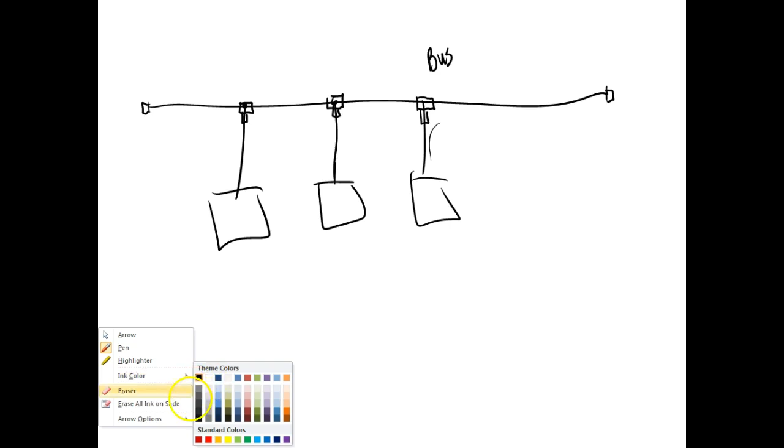Then we have what we call, it's still a bus topology, but they call it a daisy chain bus, where we bring it in, and these are my PLCs, and the cable would come in, and then it would piggyback on the other one, and then it would bounce down and piggyback on the other one and bounce down. And this is why it's called daisy chain. So we don't have a cable that runs down here.

And then what you have inside your connector is a little switch. So the last one on the line, you'd flip in that terminator. And if you wanted to add another one, you'd just flip it off on this one, then you jump another cable and then switch the terminator in. This is called a bus topology, but we call it a daisy chain. A daisy chain is just jumping from one to the other to the other.

Ethernet was originally a bus topology, and that's why I said we got all this coax cable running up through the ceiling through here. I think there's still a drop in this office back here. It's got a coax cable. That was 10 base, I mean, 10BASE-T is twisted pair, but it was 10 megabits.

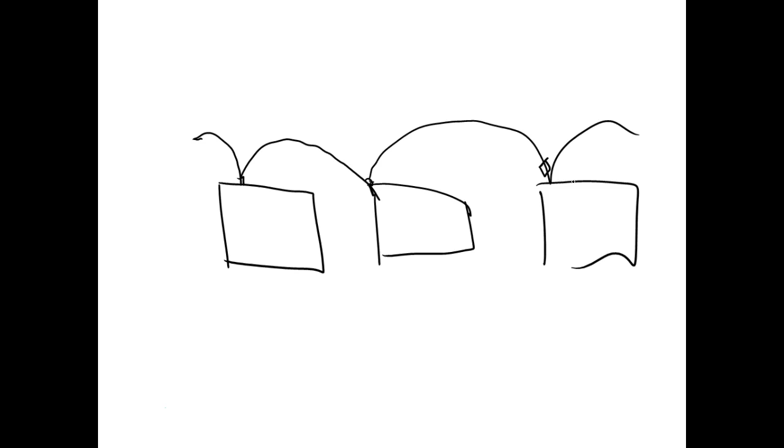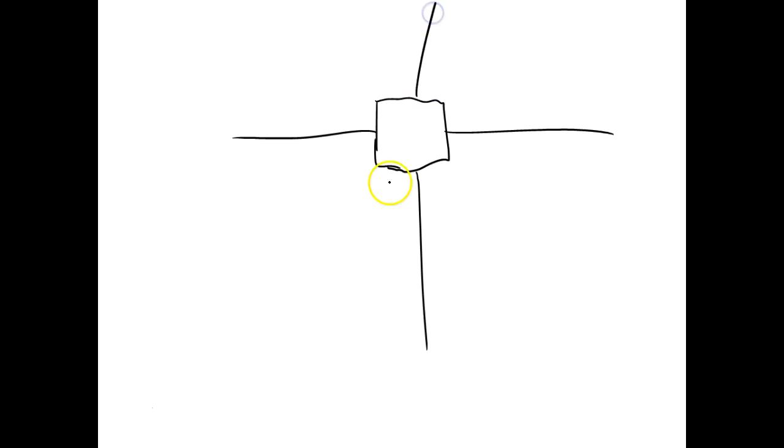Then they came out with a star topology, which is what we normally use now. Star, yeah. And what we do is we have a central device called a hub or a switch or a router. And then we come up here and we put these, and this is why it got this name, the star. So everybody's got their own cable that runs back to the central unit. And this would be called a star.

And you could bring this out and then hook this up to another switch or something, and you could come out and do that kind of stuff right there. Or you could have a switch or a router or whatever. And this is called a star topology. So this EtherNet/IP, Profinet, this is a star topology. So you'd have to have a smart device. Originally we called it a hub.

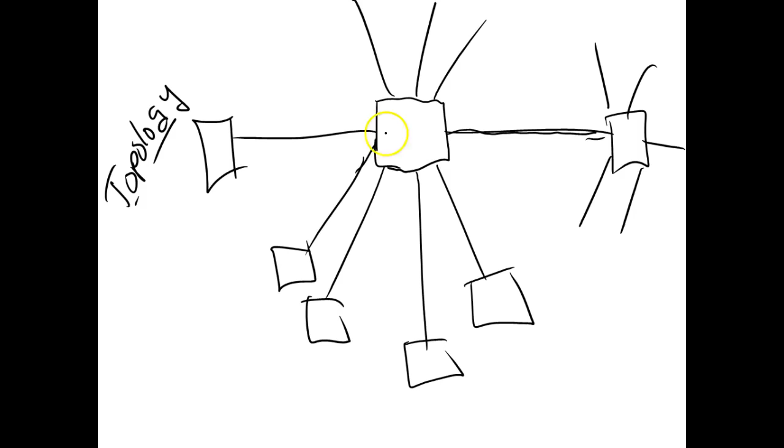These cables, if this is a wired cable, the maximum length is 100 meters before you go through a repeater or anything like that. 100 meters, about 330 feet, which is a pretty good distance. It don't mean you couldn't run it. The RS-232 interface was supposedly good for 50 feet, and they don't guarantee it after that. I saw some RS-232 things running thousands of feet, and they still worked okay. But the specification for Ethernet is 100 meters between electronic repeaters.

And this is where glass fiber has, in glass fiber, we're talking about thousands of kilometers. So originally, we used something called a hub to connect it together, and all it was was a repeater. So what was happening was this guy right here, if he wanted to put data out, it would go out to everybody, out the whole network. And so that meant only one device could be on the whole network at any one time.

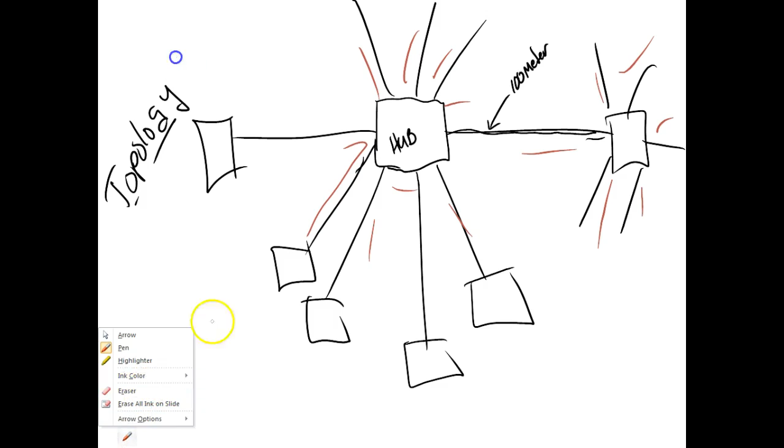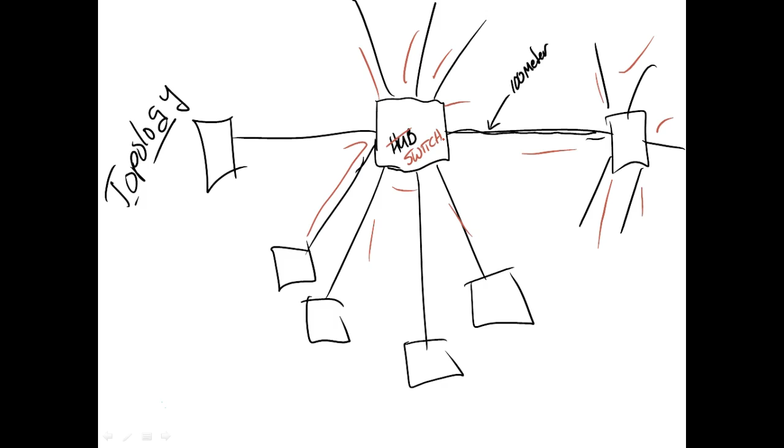So then we came up with something called a switch. So that's what we use now. You don't hardly ever see any hubs. You see a switch. Now what the switch does, it learns the MAC address of every device on the network, and it learns the IP address of every device on the network. So if I was to come over here and say I want to communicate with so-and-so, let's just call this computer A, and the rest of them B, C, D, E. So E has a packet for computer A.

Well, you'd have to know the IP or the name. And then it would come into this switch, and the switch knows where A's at. And it would connect to A, and nobody else would get traffic. So that means C could connect to B, D connect to E. The only time it would matter is if another computer wanted to connect to A, then A would have to wait. So just going to switches increased the speed of Ethernet by magnitudes.

Then we have what we call a router. A router allows you to divide it up into what we call subnets. So when you set up an IP, 192.168.80.32, there's a portion of this which we call the network ID, and then there's a portion we call the node ID. And then you establish what we call a subnet mask that tells your routers what's the network ID and what's the computer on that network ID.